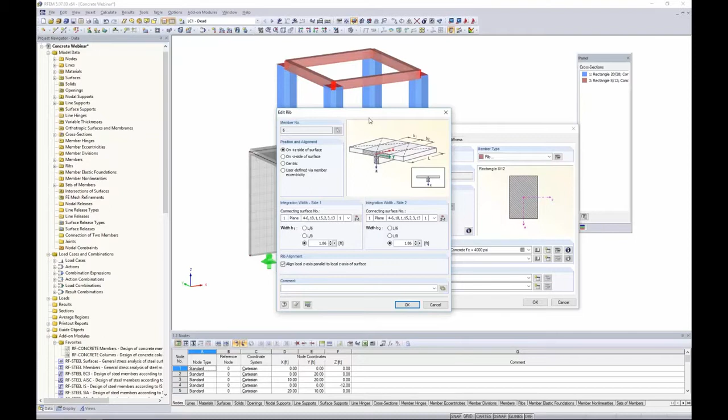What's nice about the rib is that if we go into the Edit Member Types here, we can define where to exactly place the orientation of this rib in comparison to the surface it's related to. So we don't have to manually put in rigid links to drop it down below the surface; the program automatically calculates that for us. We can also automatically set the effective widths, L/6, L/8, or enter a user-defined option. It's nice that the program has this member type as a rib, which is used quite often for concrete members.

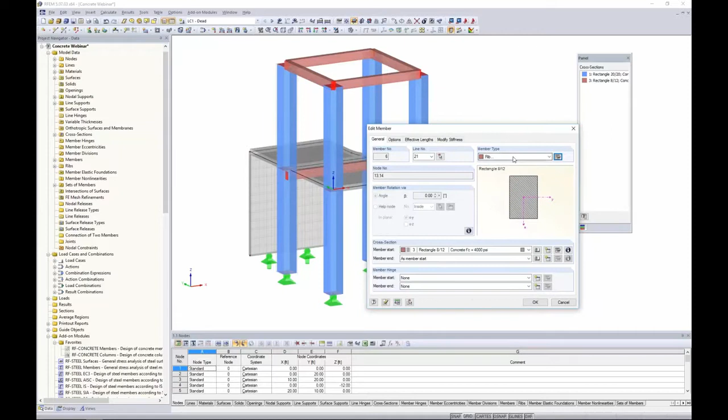You can see here that I've already defined all of this criteria. The last thing to notice about these members, if I take a look at these columns for instance, I right-click and go to Edit Member. Under the Modify Stiffness tab, this is something that needs to be done for concrete members. Typically the default will look like this, definition type none.

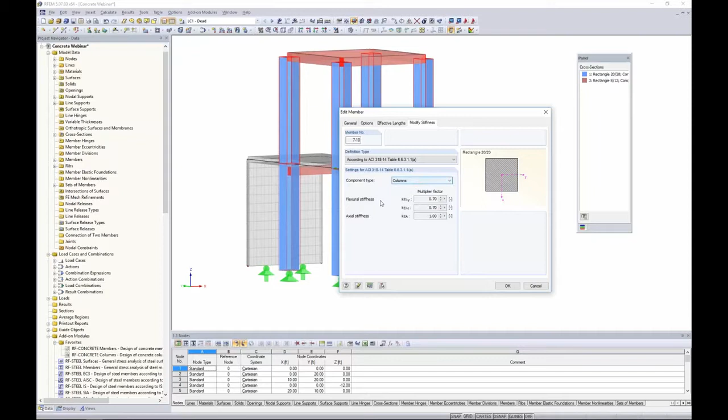What you want to do when designing according to ACI is use the drop-down here for ACI 318-14. If you click on this, it should look familiar. We have our component types: columns, walls, beams, and flat plates. Then you'll see these multiplication factors for our stiffness to take into account cracked cross sections. Anyone who's done concrete design is familiar with this. This is how it's taken into account in the program.

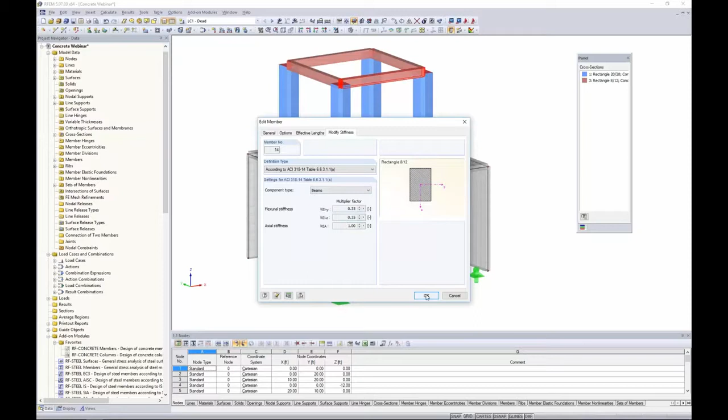For our beams, we have the exact same setting according to ACI, but I've selected beams here. This multiplication factor will be slightly different than what it is for columns, which is why we give you this other drop-down box to define the element. So remember to do so for your concrete design. This is not done in one of the modules, it's actually done in RFEM.

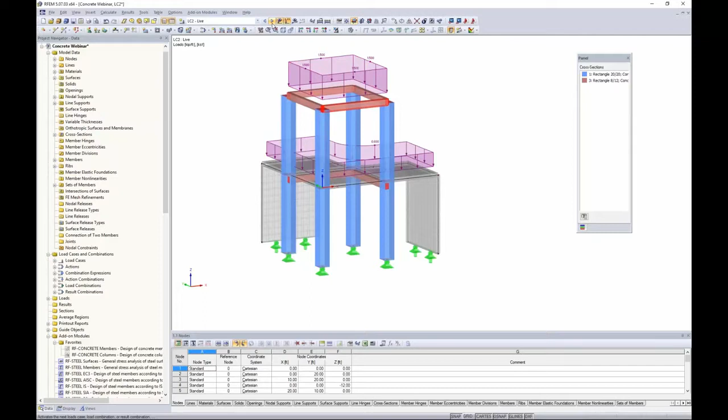The other thing to notice is that I already applied some loads here. We have our typical dead load, surface load here. I put some line loads at the top members, same thing for live load. Lastly, I put in a lateral load, wind load, applied as a line load as well to what we can call our first level diaphragm, as well as our second level to these beams.

We can also take a look at our different load combinations that were generated. If we go into our Load Cases and Combinations dialog box, we'll see our different load cases: dead load, live load, wind load. More importantly, we're interested in these load combinations. The load combinations were generated according to ASCE 7. We have all of our LRFD load equations listed here, only applicable to those load cases that we defined. We also have our ASD load combinations listed here as well.

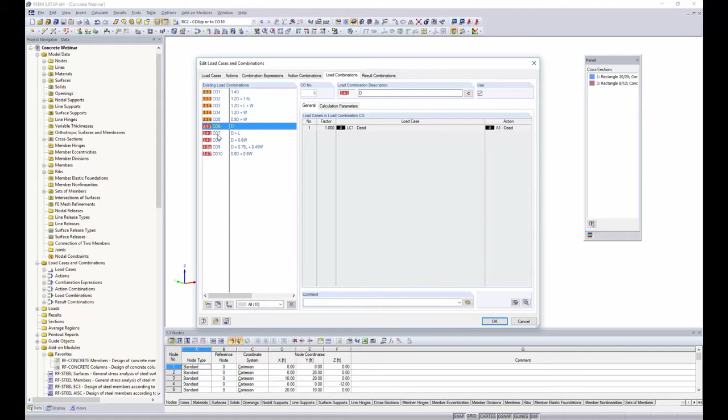Something to note, it is default in RFEM to run these load combinations as second order analysis, or P-delta. You can individually change these if you'd like to something such as linear analysis or large deformation analysis if you have things such as cables. But for now we want to keep it as P-delta effect so that we're doing our member design according to P-delta.

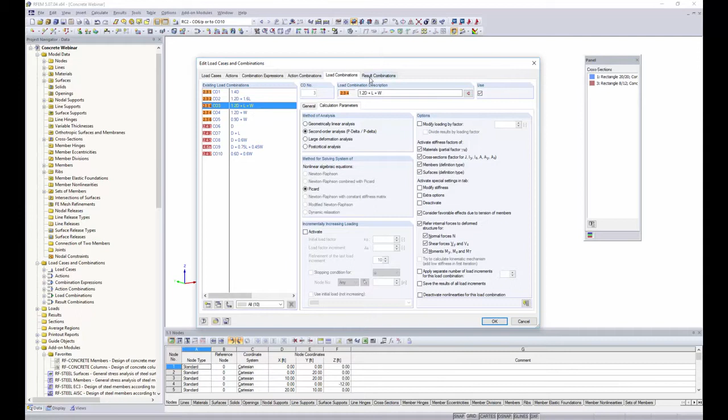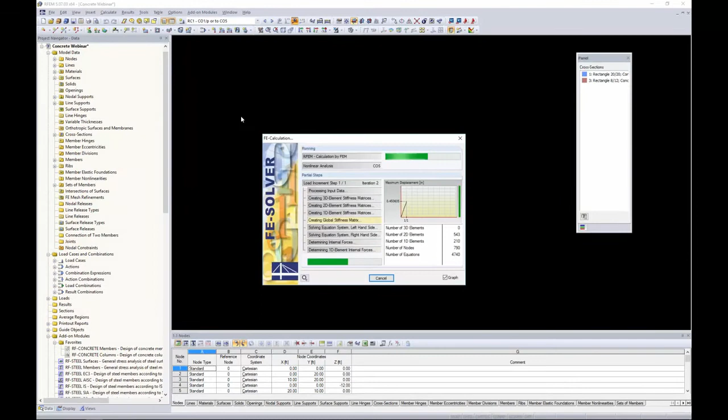We also have the results combination. This is nothing more than an envelope solution. We have the envelope solution for all of our LRFD equations and the envelope solution for our ASD equations. With that said, we can go ahead and run our first analysis with Result Combination 1. You'll notice this is nonlinear analysis, as I was saying, it's P-delta. It solves rather quickly, and we're given the envelope solution for all of our LRFD equations.

Maybe I want to jump to something more like Load Combination 3 here, 1.2 dead plus live plus wind. We can see our deflection is given at 0.779 for our slabs. We have deflections of our members. So what I was telling you is that in RFEM, all of these analysis options are available in RFEM alone.

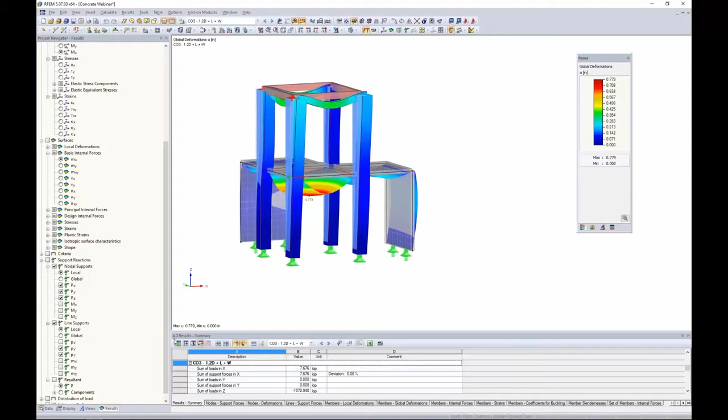Our results tab popped up here. This allows us to view our members, and I can turn this into wireframe mode, our member internal forces, such as our normal forces for our columns. Maybe we want to take a look at our shear forces, moments, for example. We can always increase this diagram to make it a little more visible, and you can print this off. So everything according to our analysis is complete.

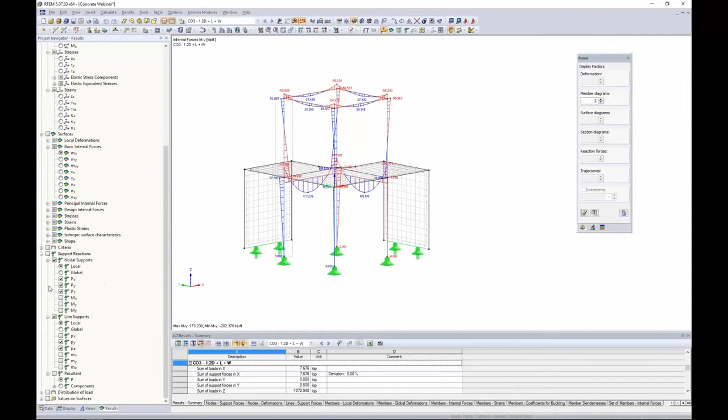Support reactions is something else that I mentioned you can easily show. I just have some simple pin conditions, and some pinned conditions at the bottom of our walls as line supports as well.

So that's basically the extent of RFEM. Now for concrete design, this is where our add-on modules come into play.

The first way to access these add-on modules is through a tab up here called add-on modules. The options are a little bit more clear in this list, with steel grouped together and concrete grouped together, so I could certainly access them through here. Back on our project navigator, in the data tab at the bottom, this is our long list of add-on modules. You can always right-click and add it to your favorites to move it up to the top. I prefer to access it through here only because it's a little bit quicker than going to the drop-down, but it's completely up to you.

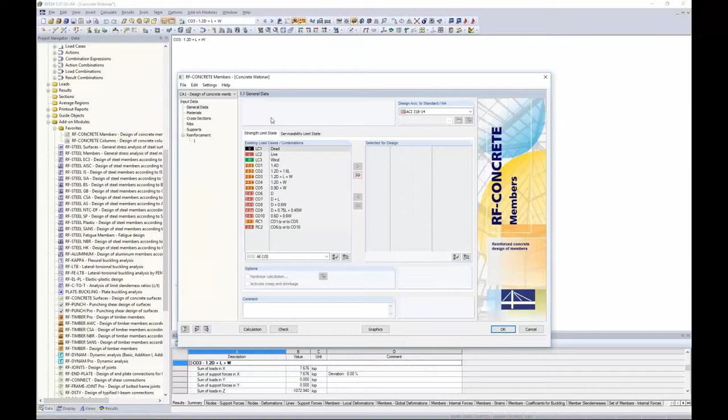So the first thing we want to do is jump into our RF Concrete Members. Something to note here: this is our add-on module. Avid RFEM users are used to this dialog box, but for others who aren't familiar with our program, this is just a simple dialog box within RFEM. All of the materials, the cross sections, the loading, everything is taken from RFEM into this dialog box, so you don't have to worry about redefining any of that information. The add-on module is purely used for code design now.

You can see here that we have design according to ACI 318-2014 selected. Now the first thing the program asks us is what load combinations we want to select for our strength limit state. We will probably use our LRFD equations for this scenario, which is pretty common. Now for serviceability options, we will choose our ASD load combinations. That's typical as well, for crack widths and for deflections we want to choose our ASD load combinations.

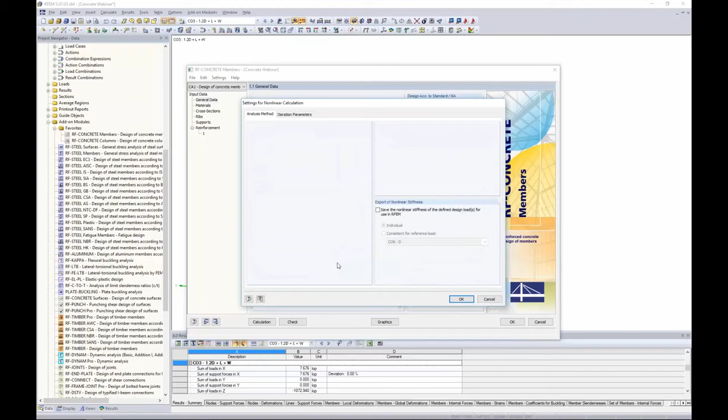Down here, under our serviceability, you'll notice we have nonlinear calculations. This is if you want to take into account creep and shrinkage. I'm not going to get into this today, but it does require an additional add-on module, Concrete Nonlinear. So if you are wanting to take into account cracked sections with creep and shrinkage, that's certainly an option here, but I won't be getting into this today. We will just be sticking with the typical linear elastic analysis.

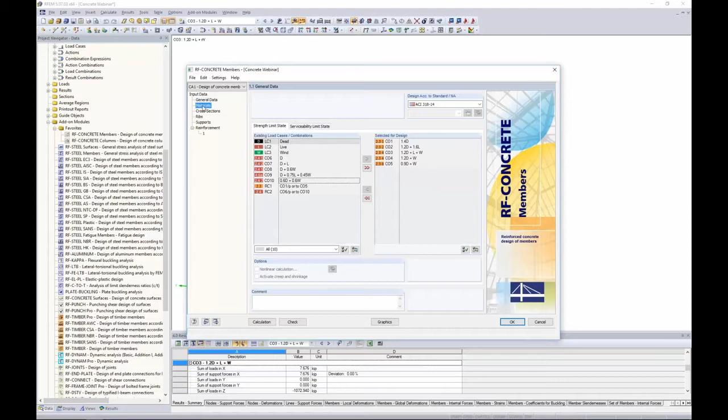Materials, as I mentioned, our 4000 psi f'c will be taken from RFEM. We have reinforcing steel grade 60. You can view the diagrams here for stress-strain for both our concrete and our steel. All of the parameters are given here.

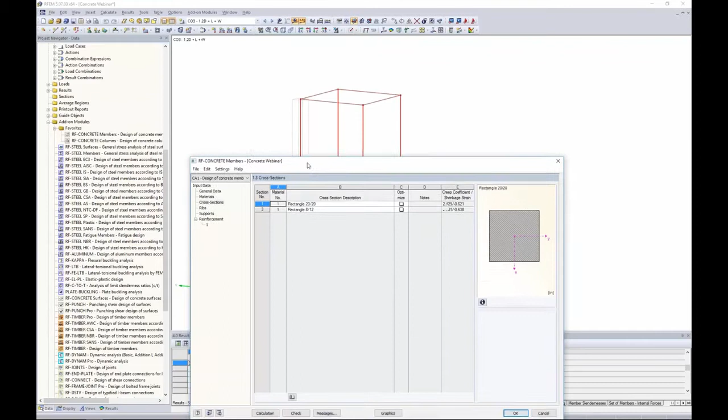Cross sections - we have the cross sections taken from RFEM. Let me exit out of this and turn it back into rendered mode. Going back into the dialog box, I just wanted to show you that under our cross sections, it's nice because as we click on these different table rows, the members applicable to this particular row will highlight in the RFEM model. So everything is synced together.

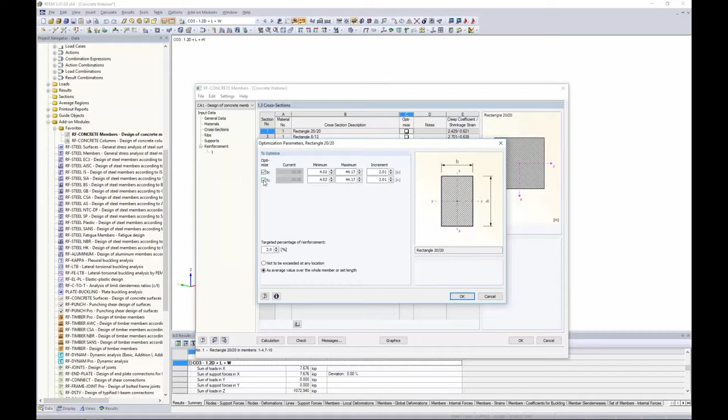We do have the option to optimize. If this is something you want to consider to get the best, most economic design, all you need to do is check this checkbox. You can see we have the option here to optimize. You can set target ranges for your width and height, B and H. You can also set a target percentage of reinforcement. Sorry, I'm just double checking one other thing.

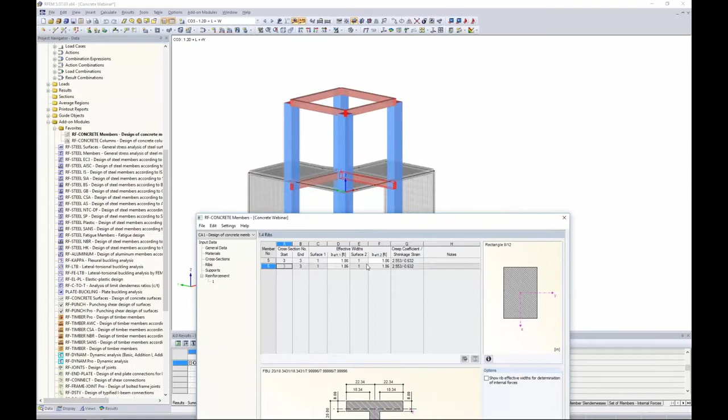Okay, now moving down the list, we have our ribs cross section. This is the ribs category. You'll notice it highlights as I scroll through these different members back in RFEM. This is the ribs that we defined at the beginning in RFEM that I was showing you. The effective width is taken into account how we set it in RFEM. You can always override this directly in the add-on module as well.

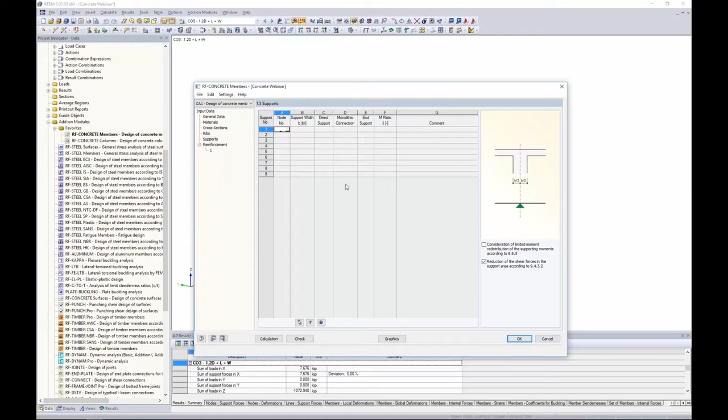Supports is something important because in the code, when we're doing something like shear design, for example, the code says you can take the required shear force a distance d away from the face of the support. Now in RFEM, and this is true for any finite element analysis program, members are just 1D member elements, modeled by their center lines. So we have no idea what the face of the support is. What's great about this add-on module is that instead of maybe over-designing for a shear force that is much too high, we can specify these particular supports.

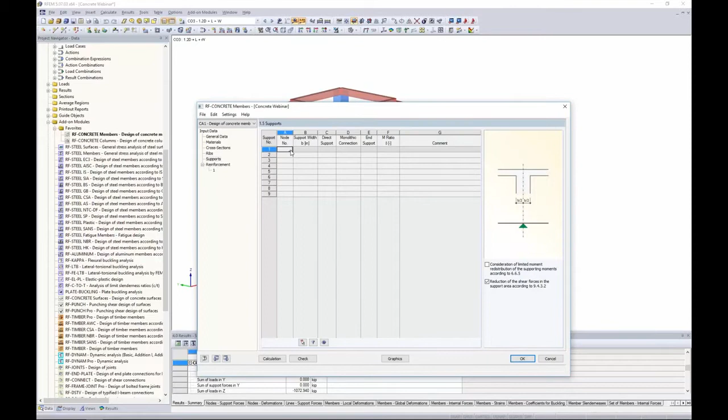All I need to do is maybe start with these nodes up here, and I just highlight them. You'll notice these four nodes are now highlighted in red. I click OK, and they're all available in this list here. Take note of this picture.

As I change things within this table, this picture will automatically update. So support width, our columns are a width of 20 inches. I'm going to set my support width to 20 inches.

For avid RFEM users, you may not be aware of this, but if you press the F8 button, it will quickly fill in these cells according to what was previously entered.

Direct support, this is self-explanatory just by looking at this picture. If I unselect this checkbox, this shows me that the beam is framing directly into that support. If I check it, it looks like it is a continuous beam resting on top of that support. For our case, we'll keep this as a direct support.

Monolithic connection, is it 1 concrete pour or is it 2? Again, shown by this picture.

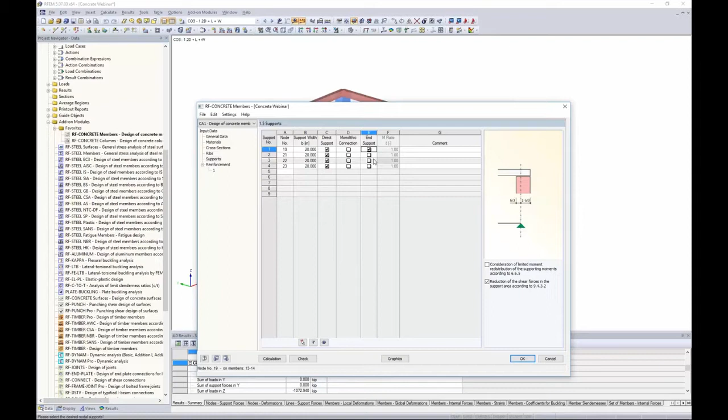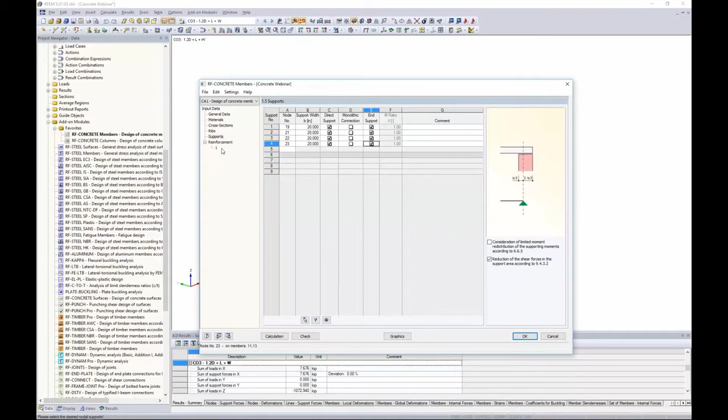End support. Is the beam continuous over the top of the support, or is this an end support condition? For our options up here, for our supports, they are an end support, and you'll notice the red arrow points to which node number I'm looking at. Again, this is great for large models. I don't have to guess, oh okay, I don't remember what node 23 is, go back into RFEM. But everything is synced together. So now we jump into reinforcement.

This is a little bit more lengthy than the other options that we've seen so far because we have a lot of code references and things to take into account according to the ACI for reinforcement design.

The first thing the program asks us is maybe if we want to define more than 1 reinforcement group. This is important if you have a lot of members, of course they're not going to have the same reinforcement layout. So you can create as many groups as you'd like, and give them different description names. For us, we just have 1 description that we'll go ahead and define here.

Applied to which member. So if you have many different reinforcement groups, you can apply them to different members. For the purpose of this demonstration today, I'm just going to select 1 member for design.

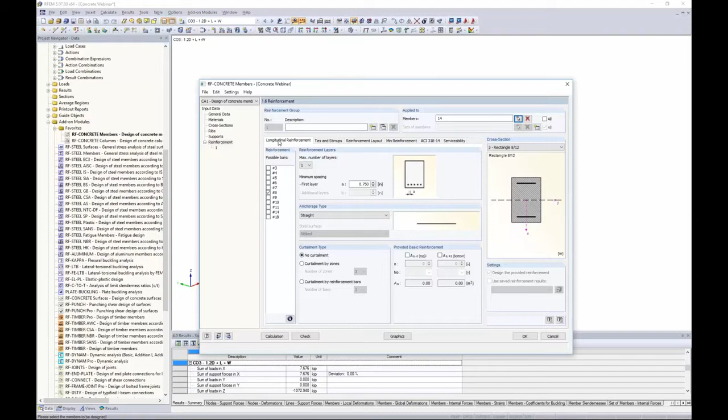Then we jump down here to our first tab, longitudinal reinforcement. What bars are possible for our reinforcement design? Well, let's say I want to choose maybe 5, 6, and 7 here. I'm not really sure exactly what will be needed, but we'll start with something like that.

Max number of layers, this is pretty self-explanatory. If I want more than 1 layer, as you can see here, it's possible. Probably more important for larger beams when you're taking on larger loads. For our case, we will just have 1 layer.

Something else I'd like to point out is the minimum spacing for the first layer. We have a user-defined entry here, so what we can do is refer back to the code, this is chapter 25. The minimum spacing for our longitudinal reinforcement must be the greater of the values of 1 inch, the diameter of the bar, or 4/3 times the diameter of the aggregate.

I have no idea what the diameter of the aggregate is. Probably as an engineer you might know that information, so of course you'd want to take that into consideration, but we do not have an entry for that in the program. 1 inch will probably be controlling here because I do have smaller bar sizes under a 1 inch diameter.

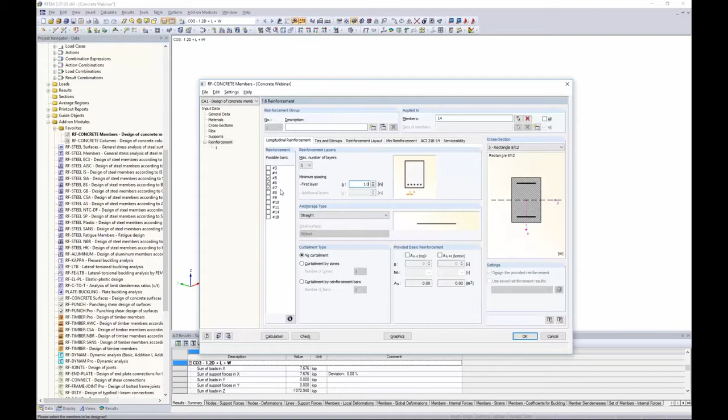Anchorage type. So anchorage and curtailment, I'll talk a little bit in more detail here. The anchorage type, we have every different option that you could probably consider. It's updated with this picture here. You'll notice we can take into account transverse bars, maybe we just want a typical hook. For us, we'll just keep this as straight. Steel surface is grayed out because the code does call that all steel surfaces must be ribbed.

Curtailment type. So curtailment is something that maybe we're not familiar with the term, others of us may be. So with that, I'm going to jump to my PowerPoint here and discuss what curtailment and a little bit more about our anchorage development lengths.

Curtailment is where we can reduce the area of our flexural reinforcement along the length of our beam because we have a lower bending moment there. What this means is that this is going to save us materials and in turn save us money. It is an option in the program to take into account, and I'll show you in just a minute how to do that.

So the other entry that we need to consider here that RFEM is doing in the background is the development length. The program knows whether the bars are in tension, compression, if they're a standard hook in tension, and it will refer to the code chapter 25 for all of these varying equations to make sure that these development lengths are correctly taken into account.

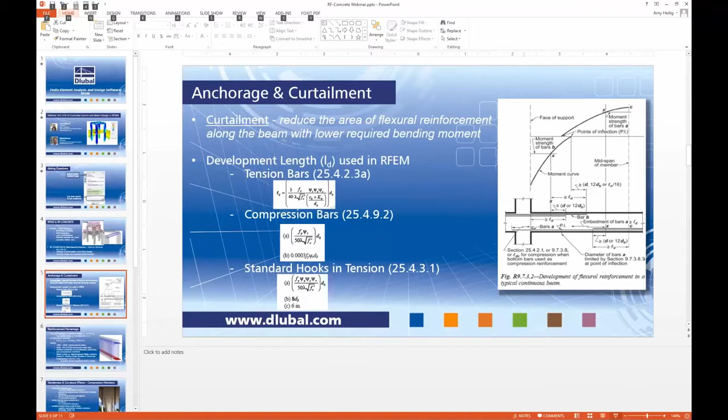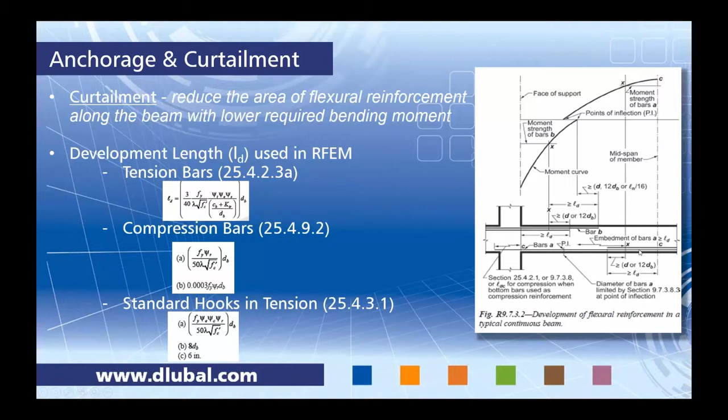Back in the PowerPoint, this is just taken directly from the code. It is figure 9.7.3.2, and this is exactly what we're talking about. Towards the face of a column, we have more of a negative moment here. We have a very low moment in between here, so maybe we don't need as much reinforcement. This would be a situation where curtailment could be used, and then obviously we're getting into higher positive moments towards the middle span of the beam, which will require reinforcement on our bottom. Okay, for our case, we'll just leave it to no curtailment.

Provided basic reinforcement. This is great for structures that are already existing. Maybe you already know the top and bottom area of steel. Here you can actually set that by just defining your number of bars, defining the bar diameter, and the program will automatically consider this as provided basic reinforcement. If this reinforcement does not meet the needs of what the design is calling for according to the ACI, the program will tell you we are considering this provided basic reinforcement, but we also need to add in additional bars in order to meet the requirements of our bending moments.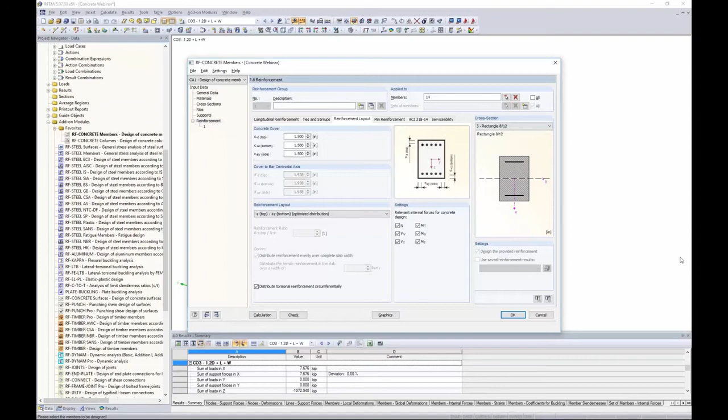Reinforcement layout, concrete cover. This comes from Chapter 20, Table 20.6131. We can consider our concrete cover here. Keep in mind as I scroll through these, this picture is synced up, so it's nice that you know exactly what you're looking at.

This is clear cover, the distance from the edge of the concrete to the edge of the reinforcement. Shear ties are considered in this as well. This is why the cover to the centroidal axis is grayed out, because as I adjust this to maybe 2 inches, the cover to the centroidal axis will be adjusted based on what we put in for possible bar size.

Reinforcement layout: this is how you want the layout for your top versus bottom longitudinal reinforcement. Do we want it optimally distributed? Maybe we want a symmetrical distribution so the top matches the bottom. We also have options to define spacing or layout based on ratios of top steel area over total steel area, or define it as bundled bars in the corners with uniform surrounding, more typical for columns. For us, we'll keep it as optimal distribution for our longitudinal reinforcement.

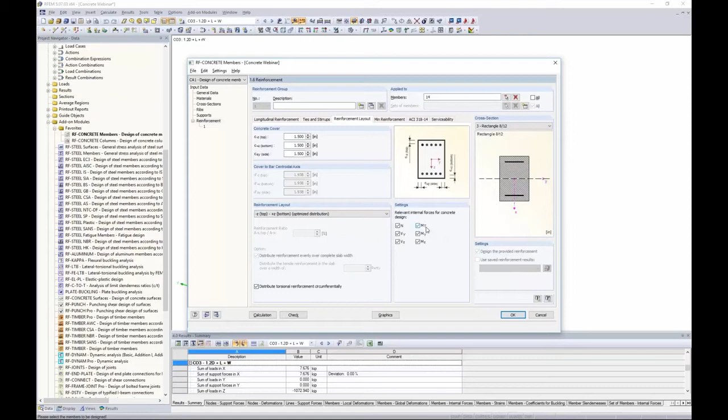Settings: these are the internal forces the program is designing for. We get asked quite often, do we design according to torsion? Yes, we do - you can see here we take into account bending moment according to torsion. We also design for shear and moment as well as our axial forces.

Minimum reinforcement: we have two check boxes here to account for minimum longitudinal reinforcement according to the ACI, as well as minimum shear reinforcement according to the ACI. If you have a user-defined minimum reinforcement, just click this button, define the number of bars and the bar number, and the program will take that into account as well.

Secondary reinforcement is for any reinforcement beyond what is required structurally. So if you are looking to put in a bit more reinforcement than what's required, this is where that's done, under the secondary reinforcement option here.

ACI 318-14, percentages of reinforcement. You can see the default is set at 8% here.

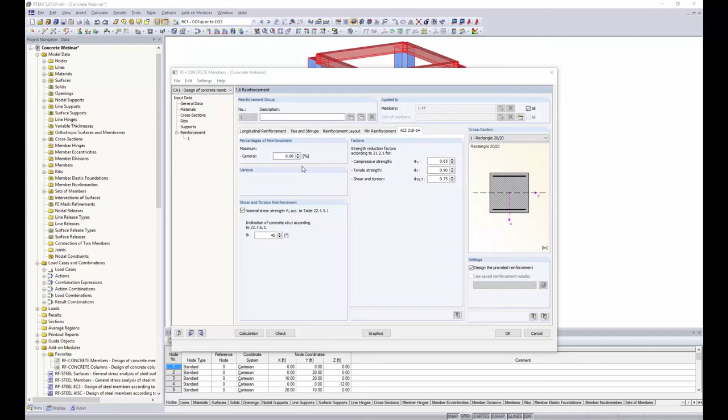This is something I'd like to go into more detail on, so we'll jump back to our PowerPoint. The code tells us that for flexural members, and members where axial load is less than 10% of the concrete strength times the gross area of the concrete, our net tensile strain must be greater than or equal to 0.004. This comes directly from the code, Chapter 9, Section 331.

Now, compression members or columns are actually given a reinforcement percentage. So our steel area must be greater than 1% of the total area, but less than 8% of the total area. This is explained further in Chapter 10, Section 611.

A little history about this: from 1963 to 2002, reinforcement ratios were used regardless of whether it was a compression member or a flexural member - we always used these ratios that you're used to for columns. Then in 2002, the ACI introduced strain limits, which is what you're seeing according to Chapter 9331. The purpose was to achieve uniformity across pre-stress, reinforced, and compression members.

I pulled this information from the journal Case Studies in Structural Engineering, which has an article called Strain Limits versus Reinforcement Ratio Limits. What's interesting is that if you're an engineer used to these pre-2002 reinforcement ratios, and the net tensile strain isn't very intuitive to you, this professor converted the stress equations back into ratios. He found there really was no difference - converted back to ratios as a percentage of gross concrete area, it comes close to the net tensile strain being greater than or equal to 0.004. Worth checking out if you're interested.

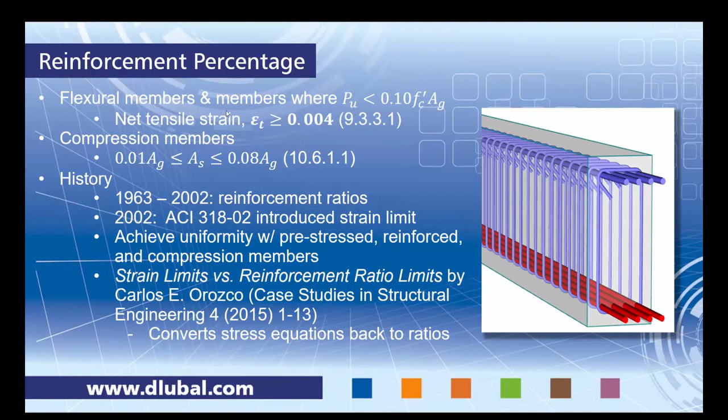With that, we can jump back to RFEM. Back in RFEM, we do have this set at 8%, but keep in mind, according to the code, for flexural members we need to check our tensile strain after analysis, because realistically this is irrelevant if we are not meeting the code requirements for tensile strain.

Shear and torsion reinforcement: we have our nominal shear strength according to Table 22.551 in the code. Inclination of concrete strut relates to our torsion - the default is 45 degrees. You can certainly put in another angle, and for more information it's best to refer to the code, Chapter 22.

Factors - pretty self-explanatory here. If you've done concrete design, we're all familiar with strength reduction factors. It's in Chapter 21 of the code. These right now are set to what the code calls for.

However, you certainly can change those if you choose to do so. But keep in mind, if you are doing design according to the ACI, then you will be following the code for these entries.

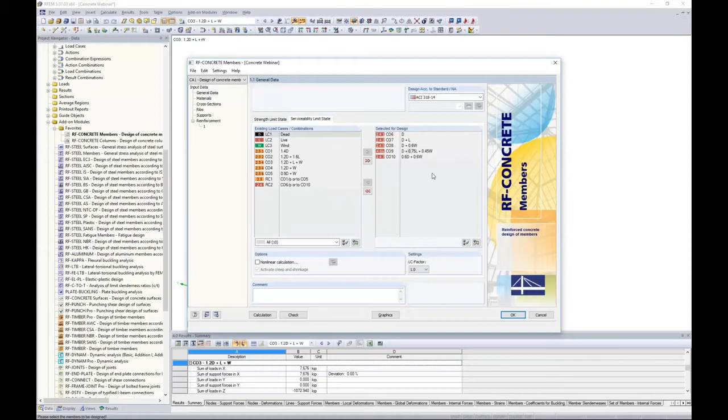This serviceability tab is only available because, back in the General Data tab, we defined our ASD load combinations for serviceability. If I defined no load combinations here, I would not have this serviceability option. So if that's missing, it's probably because you didn't define any serviceability load combinations.

Crack analysis. We have the options here to limit the value for allowable crack width based on a couple of criteria. The first option is limit values, and in this drop-down box, the ACI did studies on various exposure conditions and came up with a limiting crack width that approximates what the max crack width should be. For example, if you're in a water retaining structure, your crack width is much smaller than if you're in dry air. For us, maybe we'll stick to something like humidity, as if the structure is down south where it's quite humid. Same for the bottom, so our crack allowable width is 0.012.

Now you also have the option under user defined to just type in whatever you'd like. But we do need to give it some type of limit so that the program knows to flag it if we are over those limits.

So how exactly do we determine what the crack width is? What's interesting is the ACI does not give you an exact equation for calculating crack width. In chapter 24, it tells you to limit the longitudinal spacing so that you can decrease your crack width, and that comes from this section in the ACI. So when you have this checked, the program will limit your spacing based on this criteria.

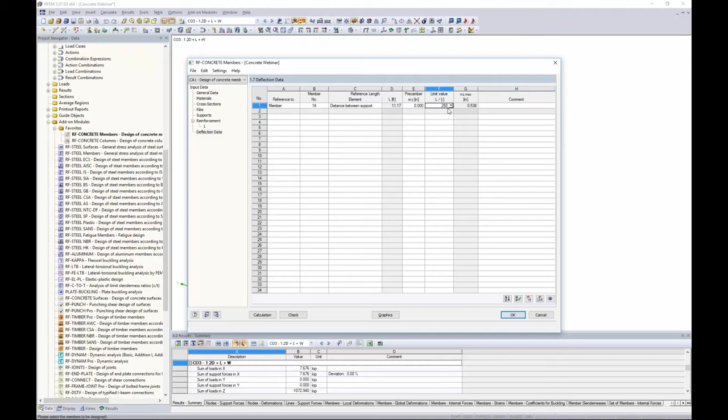Back here under serviceability, we also have the option to activate long-term deflection according to 24241. This is just a table in the code that will take into account in the calculations for deflection the duration of the load, and we can set the number of months here.

So with that said, I think we are finally ready to run an analysis. Now, all I need to do is click calculation in this add-on module, and what it's giving me now is reinforcement design according to ACI. So you'll see here that now all of this reinforcement, or this results section, is available here. The first thing to look at is our required reinforcement.

In this table right here, we will see a summary according to cross sections, or maybe we want to view it by member. Because we only defined one member here, we're still just looking at member number 14, so it doesn't matter. We're getting basically a summary of our reinforcement - our reinforcement at the top given, our longitudinal reinforcement at the bottom, and then we have the reinforcement for required longitudinal torsion. You'll notice this is set to 0, so this is only applicable if we have some torsion within this beam.

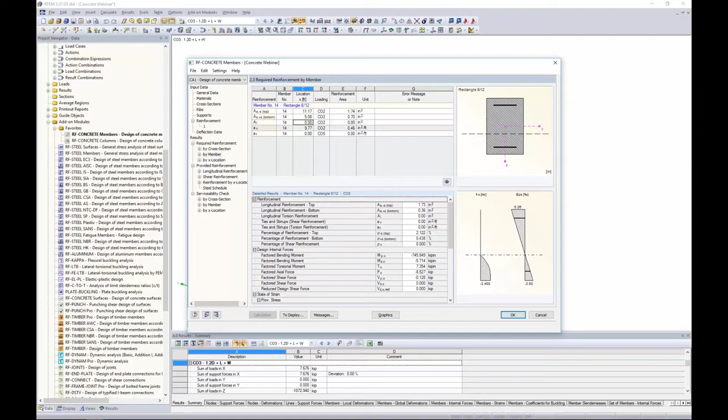Then we have our shear reinforcement, and lastly our stirrup reinforcement for torsional moment. This is 0 because we don't have much torsion in this particular beam.

As I click through these different options, my stress strain diagram updates here according to my cross section.

This is also something I really want to emphasize. There are a lot of other programs out there where you simply don't know where your numbers are coming from. I really think RFEM is such a strong and powerful program because we always try to give you as much information as possible. This allows for very few tech support calls and emails saying 'I don't understand where these numbers are coming from,' because we list all variables here and give code references where we can, so you can really understand where those numbers come from.

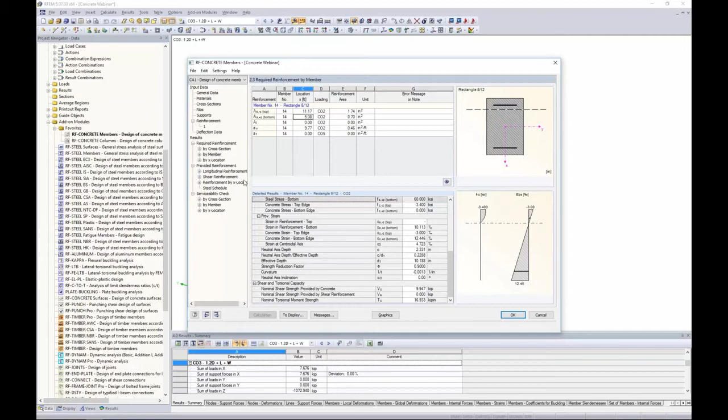We can also view the required reinforcement by X location. What's nice is that as I scroll down through these different options, you'll notice this red arrow updating depending on where I'm at along the length of the beam.

So for large models, this is beneficial so you can really understand what exactly you're looking at. And again, we have the long list here that updates as we scroll through these different options to show all of our variables and how we came up exactly with these numbers.

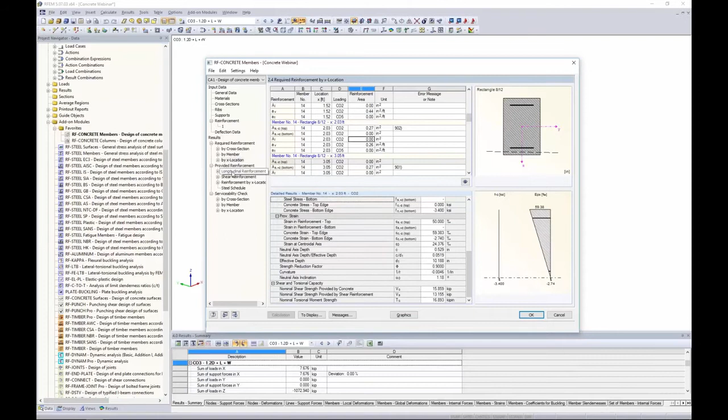So now that we know our required reinforcement, the program needs to come out and give us some sort of design, and that's where this provided reinforcement comes into play.

The first tab here is our longitudinal reinforcement. So in order to meet the required reinforcement, the program has set 3 number 7s up at the top here and 3 number 5s at the bottom to meet those requirements.

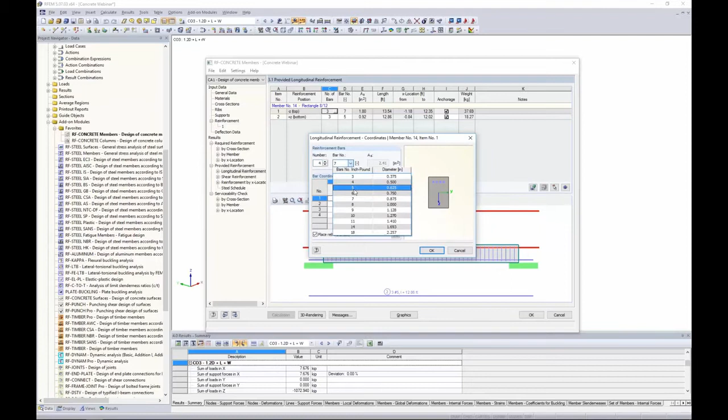What's nice here too is that if you take a look at this and think, I'd really prefer not to use number 7 now, I can easily click in this table. I can increase to 4 number bars, and I would like to use number 6s. I click OK, click on any one of these other tabs, and the program says, wait a second, you changed your values for your number of bars and bar size. I need to recalculate. So you quickly recalculate, and the program updates only what's applicable to the changes you just made. A very quick and efficient way, rather than jumping back into this reinforcement to force the bars the way that you would like them.

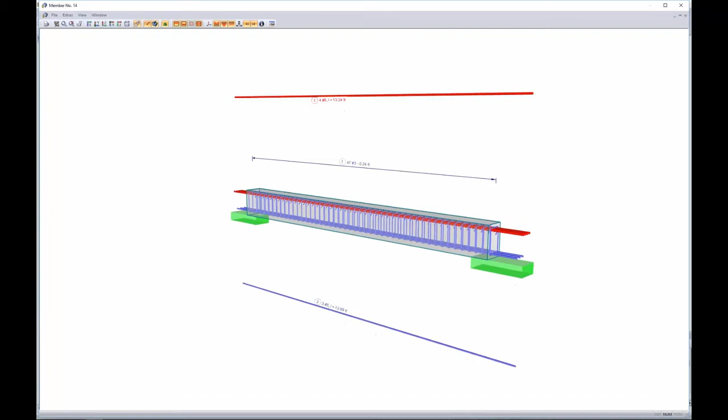What's also interesting here is we get this nice picture, but if I double click in it, I get basically the 3D layout of my reinforcement. You can see here that I have my longitudinal reinforcement shown, and I have my shear reinforcement. It even shows the development of my shear reinforcement as well. I'm given the callouts for the bar sizes as well as the number and spacings. I have control here to turn on and off any of these reinforcement bars, and this is great for printing purposes.

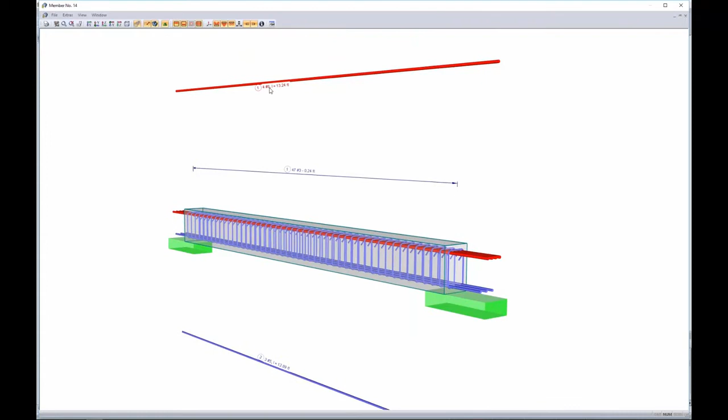And just like in the tables, if I think, never mind, I want to go back to 3 number 7s, I can just double click in here and I'm given those exact same options you just saw in the table. Again, this is a great and efficient way to quickly make changes. Maybe the anchorage type needs to be a hook instead of straight. I click OK and everything is automatically updated.

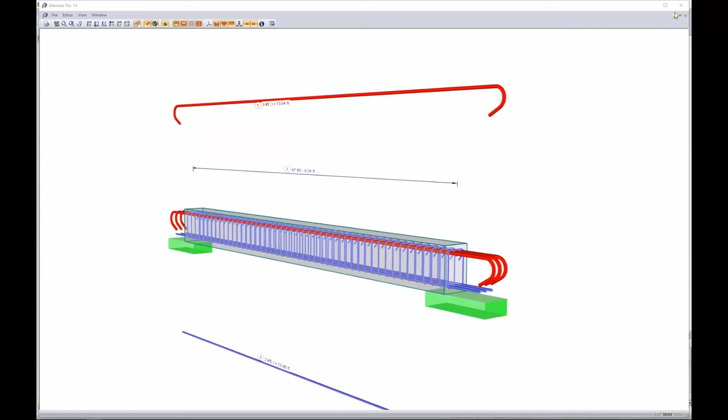So I click out of this picture, maybe click on another tab, the program says, hey, you made changes, let's recalculate. It recalculates only those bars that had changes so that everything is updated in our results. Shear reinforcement, same exact concept.

We give you a nice cross-section here, including the lengths for the shear reinforcement and the development. Same thing, picture, we can double-click on it, and it looks exactly like what we were just viewing. In both pictures, you can modify any of the reinforcement and add this to your printout report with just the click of a button.

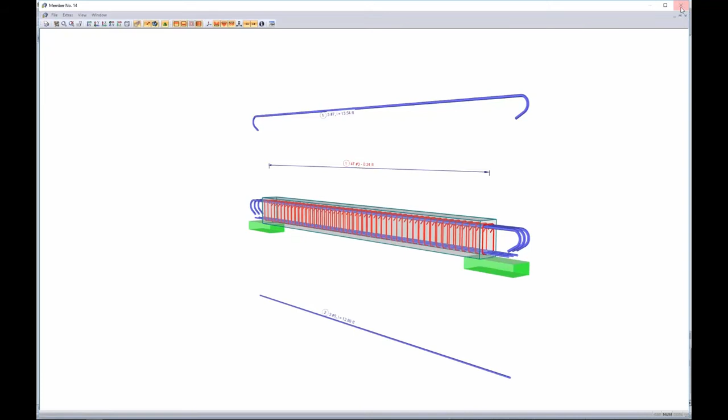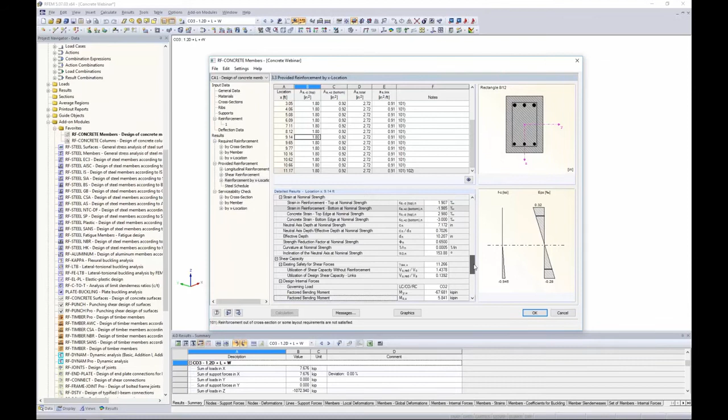Reinforcement by X location is basically just a summary along the length of the beam. Again, this nice red arrow shows us where we're at. We get a summary of our top and bottom longitudinal reinforcement as well as our shear reinforcement. And as I always like to mention, here is our list of any variables and equations that went into calculating this reinforcement.

Lastly, we have a steel schedule. This is your material takeoffs, which a lot of us, of course, are interested in for the total steel.

Serviceability check. This just relates back to the crack widths and the deflections. You can see that according to the deflections, we have a ratio of 0.41, so we are under those limitations that we did give it under the deflection data back here.

Now we have our spacing limitations, which I mentioned the code calls out for cracking. And we also have the ratio according to the Gergely-Lutz equation, which you can see here is calculated in comparison to the limiting crack widths that we also gave it in this criteria.

So we can view it by cross-section or by member. Again, same scenario since we're only doing one design here, and of course by X location.

Something else to notice in any of these tabs, you'll notice this notes section. If you see any numbers here and click on this messages, it should correlate to any warnings or just information that the program would like to give you about your reinforcement design. For example, this says 334, the effect of the bending moment MZ is not considered in the given deflections.

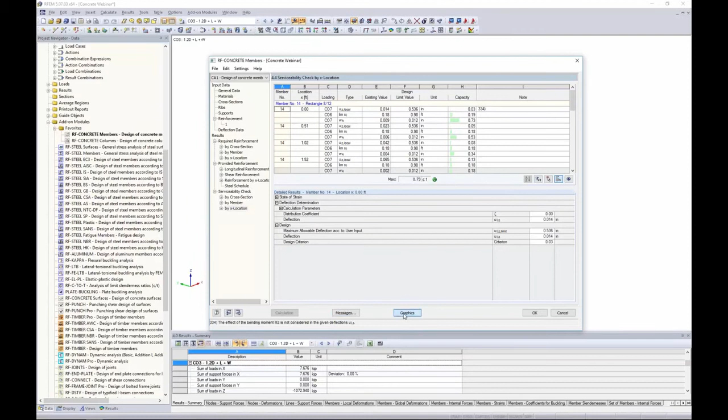So this is important if you are seeing those numbers to just quickly take a look at the messages. And the other thing that we can do is we can view everything graphically here. Once I click graphics, you'll notice in my drop-down box here, I have another option called RF concrete members.

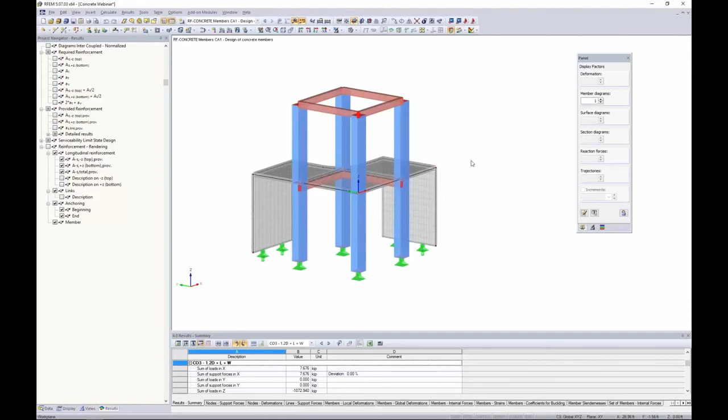Now in my results tab, I no longer have all of the internal forces from RFEM. I can easily jump back to those, but now I'm looking at the results from my concrete module. I can turn this back into wireframe. Maybe we want to take a look at our top and bottom reinforcement. This is nice, maybe we want to add this to some pictures, and you have all of these options to view this graphically as well.

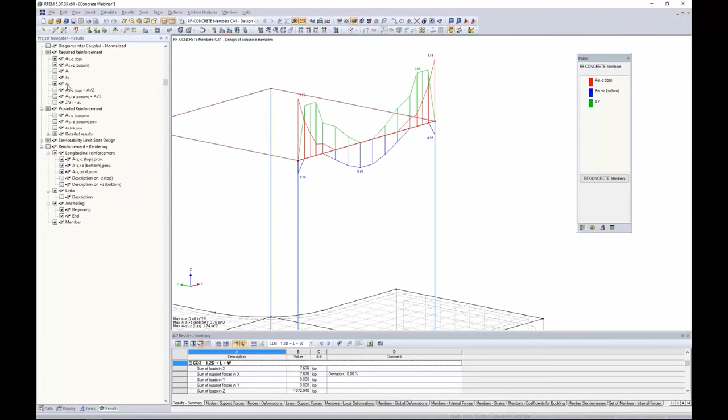Sometimes this makes a little bit more sense than viewing things over and over again in a table just to reiterate what exactly is going on. You can see here shear reinforcement, and actually you can even show that nice rendering picture that we were viewing in directly in the model. Again, maybe good for printing purposes just to show you how things are related here to the rest of the model.

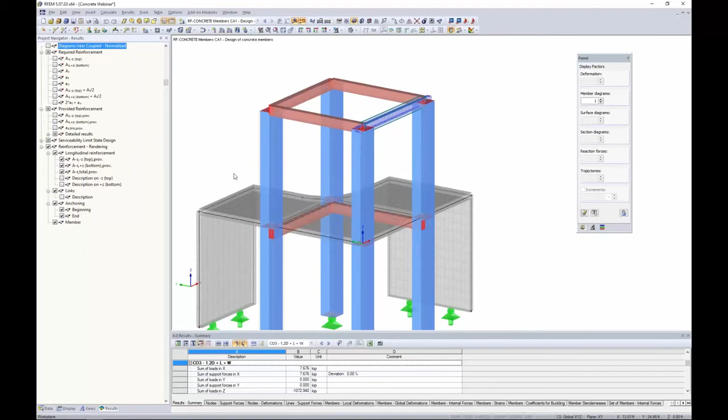So with that said, that basically sums up our beam design. Now we want to jump into our column design. And before I do that, I want to go back to the PowerPoint because this is something that is very important in regards to column design.

We often get asked, okay, do you design columns according to the moment magnification procedure or second order analysis? And this is where I really want to clear up what's going on in our add-on modules. The code in ACI 2014 says that we have 4 different options to account for slenderness and curvature effects for our compression or our column members.

The first is a first order analysis according to section 6.6. This is purely a linear first order analysis. Now, second order effects are taken into account with our moment magnification procedure. So those of you who've done column design probably are very familiar with the moment magnification procedure. Basically, this will just increase our moments to account for those second order effects.

What's great about the moment magnification procedure is that you as the engineer can easily cross-check these numbers in comparison to the software. When we're getting to a little bit more complicated analysis, it's not that easy to cross-check by hand calcs, but with this option, we certainly can do so.

And first order analysis with moment magnification is taken into account in RF concrete columns. So this is the module that I will show you guys next. Again, to reiterate, first order analysis, RF concrete columns.

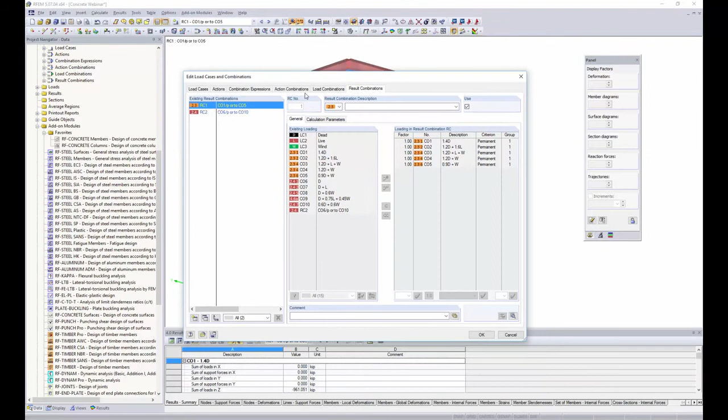Back in RFEM, this is in RFEM, not the add-on module, we want to go to our load combinations dialog box. As I previously showed you, all of these load combinations are according to second order analysis. What we actually want to do here is select all of our load combinations and choose geometrically linear analysis. This is important so that we don't account for second order effects in RFEM.

Then we go into our RF Concrete Columns and again account for second order with moment magnification. Now the program is smart enough to throw up a little warning saying, hey, you are accounting for second order effects twice. Realistically it's not that much of a difference if you choose to do so, but it will still warn you that you are accounting for them twice.

So for the sake of this, to correctly take into account moment magnification, we want to change all of these load combinations to a linear analysis. Now, if you are jumping back and forth between beam and column design, maybe you want to make a copy of these load combinations, set half of them to linear analysis and set the second half to second order analysis. Then you can individually assign those load combinations in these separate add-on modules.

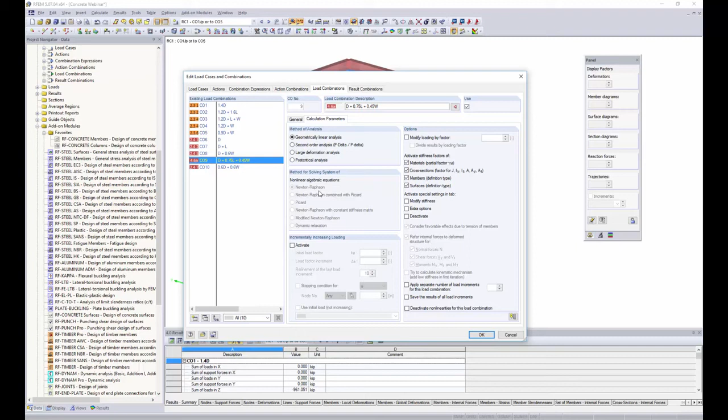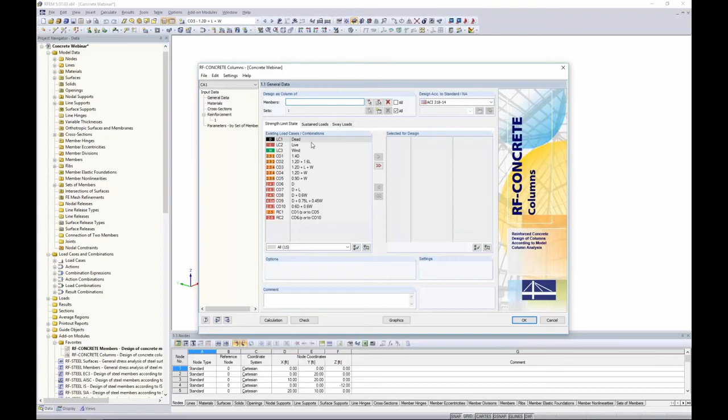So now that that is done, we can go into our concrete columns and take a look at our design loads here. So now all of these design loads are ready to go with a linear analysis taken into consideration. This module looks very similar to what we were just in, but you'll notice we're in the Concrete Columns add-on module here. We need to define the members or the sets of members.

If I go back to the add-on module and turn this into wireframe, you'll notice these two columns here, and it has this dotted line around it. This dotted line means that it's a set of members, and the reason why I did that is because we probably want to design these two columns to have the same reinforcement, maybe the same size, maybe they'll be cast as one continuous member, whatever it is.

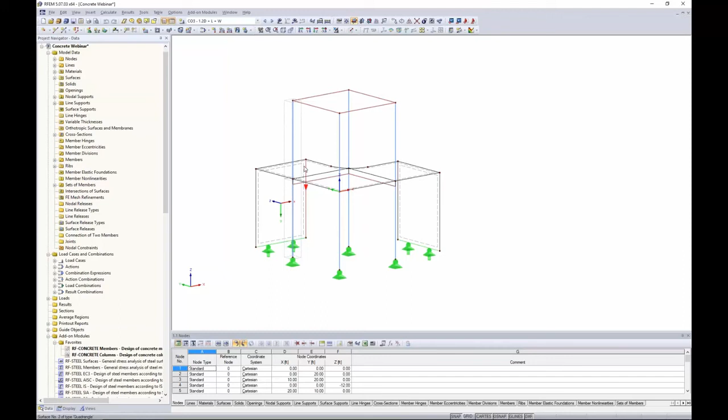We probably want the same design for all of them. So all I need to do is right-click, select both of them, right-click, and then here I can create a set of members. This is a continuous member now.

So when we're back in this add-on module, instead of designing each individual member, I have the option down here to design according to my member set. So I'm going to design according to this single member set here for the purpose of this example. Strength limit state, I am going to choose my LRFD equations here. And then we get into our sustained and sway loads.

And this gets a little bit confusing because this is obviously very different than just our typical strength and our ASD load combinations for serviceability. So going back to the PowerPoint, I do expand on this a little bit further.

Here, as mentioned, we are doing a first order analysis. I know I repeat that a lot, but that is the whole purpose of this add-on module. As you notice, we have the strength limit state, sustain loads, and sway loads. Strength limit state load combinations used for design are typically LRFD.

Sustained loads come from section 6.6.3.1.1 and another section. This tells us we need to take into account additional deflections due to creep. This doesn't necessarily have to be a gravity load, it could be a lateral load as well. Typically you'll find things like dead load are something you want to consider for creep, and that's where we'd add this into the sustained load, something like our load case dead load.

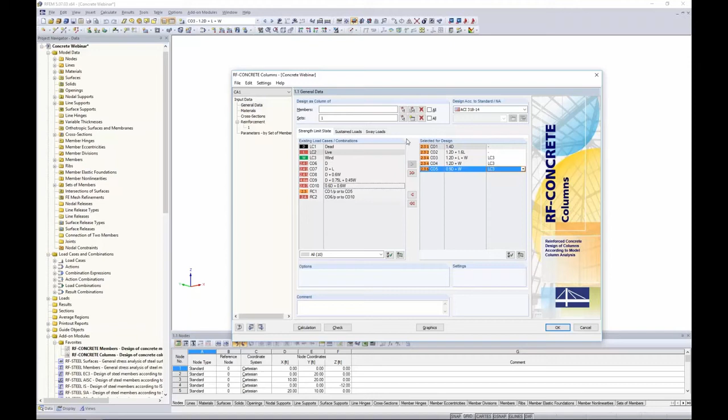This is very important to remember: back on the strength limit state, we now have this drop down available, and we need to choose which loads in this load combination are used for sway purposes. So here you can see I'm selecting load case 3 for wind, which is what I put under my sway loads, and it's now available in this drop down. That's a little bit about why we have these different tabs. They really do affect the moment magnification procedure.

Materials - again, a lot of this is just repeat information from the previous add-on module, so I'm not going to spend a significant amount of time. Materials is taken from RFEM. We have our cross sections. You'll notice we don't have the option here to optimize, so just something to keep in mind within these concrete columns.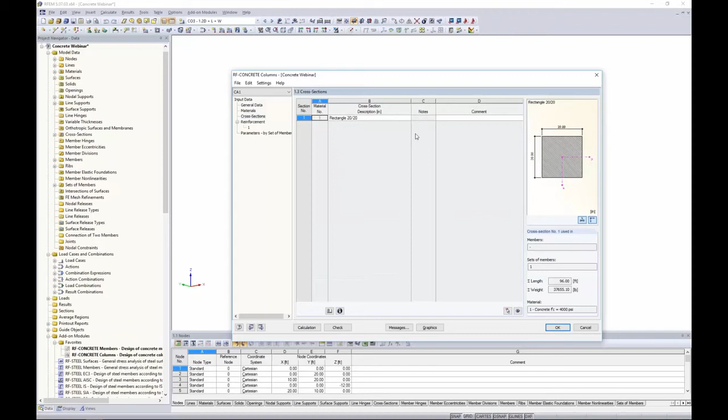For reinforcement, we choose the reinforcement type we would like to consider. The layout is typically uniformly surrounding for columns. Anchorage type, we have straight, hook, bend. We also have the option to consider steel surface such as zinc coated or epoxy coated. This will be added in our other add-on module fairly soon as well, because it does affect your development length.

Ties and stirrups, same concept as before. We'll select number 3 as a number 4 to be considered. Secondary reinforcement, again, this is just any reinforcement beyond what is structurally needed. For us, we won't consider this.

Reinforcement layout - you have the option here to define your cover according to the centroidal axis or the edge of the rebar. I always like to choose the edge of the rebar, it just makes a little bit more sense to me. The centroidal axis will be updated considering your shear reinforcement as well as half the diameter of the longitudinal reinforcement.

The program also asks us the bar number to be considered for preliminary design. Well, maybe I want to choose the most economical, number 4, for example.

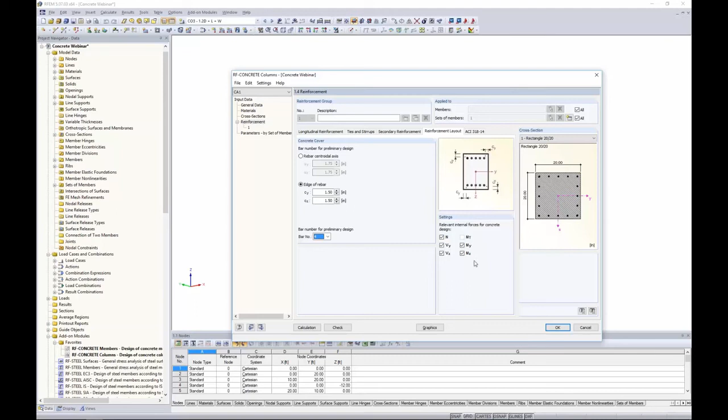Relevant internal forces for concrete design - you'll notice here we do not design for torsion within this add-on module. So if torsion is something you want to consider for your columns, you would need to do so in the concrete members with P-delta effects and that sort of application. In the code under the column sections in ACI, it really just says if you have torsion that exceeds a certain amount, refer back to the beams. So that's why we really don't have an option here to design for torsion, but it is possible in RFEM itself.

And lastly, ACI 318-14 - this is all the exact same stuff that we just saw previously, giving our longitudinal reinforcement minimums and maximums, our strength reduction factors according to the code, as well as our shear reinforcement. Notice that torsional reinforcement is not considered here.

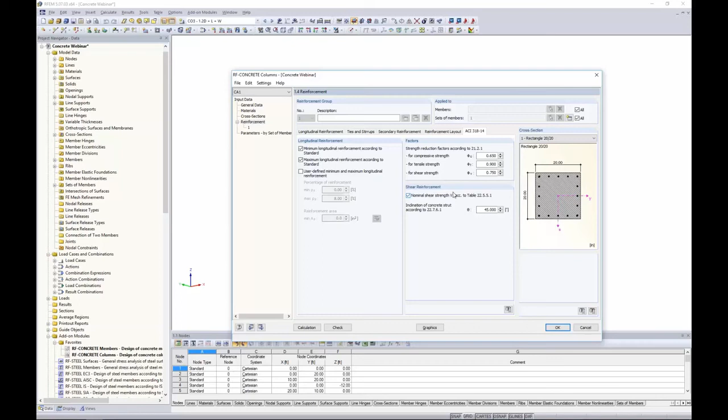Parameters is something that is lastly important for the moment magnification procedure as well. Here, if we want to consider buckling about our Y or Z axis, which is given here - and by the way, if you are not sure about your Y or Z axis, you can always right-click on your members and turn the local axis system on.

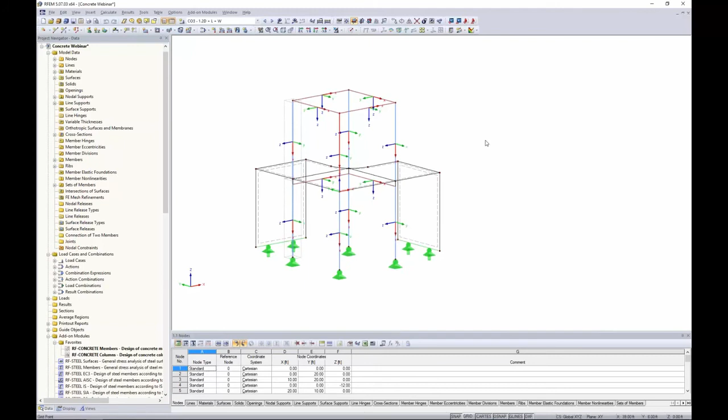So now we can see what direction is Z and Y. We can even turn this into a rendered view so that we can view, if we didn't have a square column, what exactly is going on with our local axes.

So with our parameters here, we want to define if buckling is possible. Is it unbraced or is it braced? The program will automatically calculate these K factors according to the code. We have those different charts in the ACI that calculate these K factors, and the program takes all of those into account.

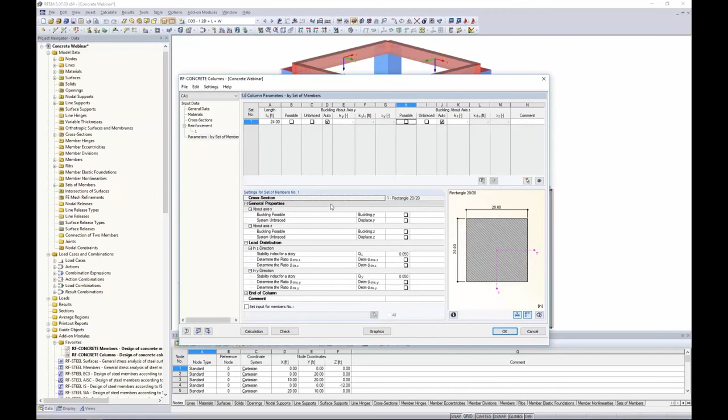Same thing with buckling about the Z-axis. For this option, I'll just leave this unchecked for now just for simplicity. Again, all of our information is given here in the tables down below.

So now we're simply ready to run a calculation. Should be basically what you're used to seeing in the other add-on module, but now we have a set of members that we're designing for.

The first thing that pops up with our results is our check, our set of members. So you'll see here that we have our design ratio, and we have the code reference immediately available here. This is really nice, so you know exactly what's controlling overall for this particular column design.

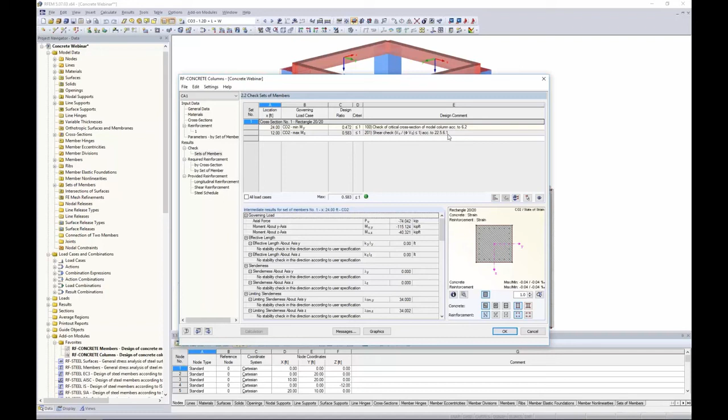Right now we have a check of critical cross-section of the model according to 6.2. Our shear check is according to 22.5.6.1. We have our nice green smiley face because we are below 1.

And as I always love to point out again, everything is available here in our table, all variables that came into play with any of these checks and code references where they're applicable. So again, not a black box type program, but anything you'd like to know how this came into account for the calculations, we try as best we can to put it into the program.

You also have these little pictures down here. We can view the stress diagram of the concrete. We can give it value. So if this is something you're interested in, this is available here.

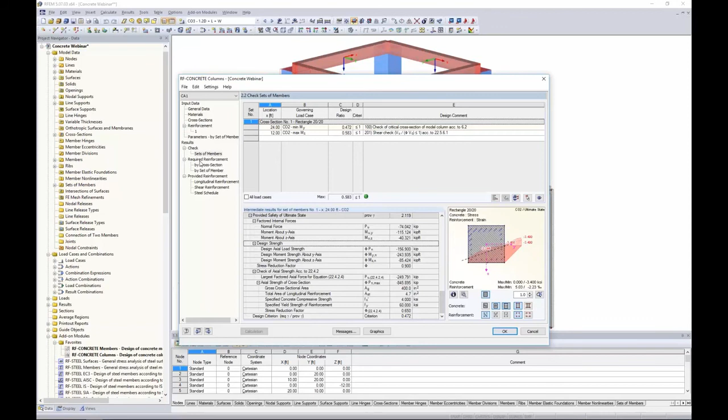Required reinforcement, this should look a little bit similar to our other add-on module. Obviously here we're only giving longitudinal and shear. We don't do torsion. We're just given the basic layout for those.

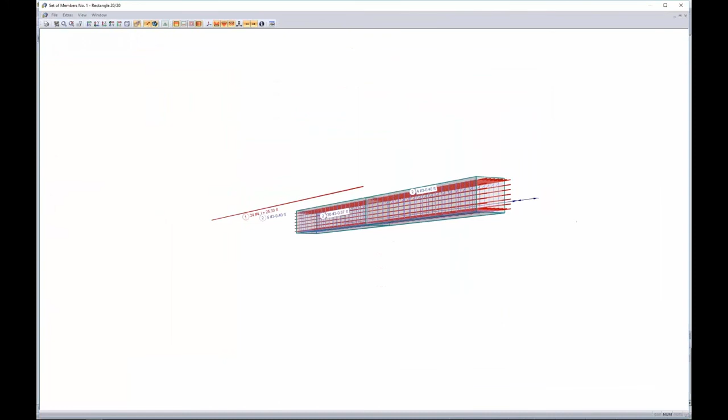And lastly, the provided reinforcement. This looks just like our picture for beams. We can double click and we're given a nice 3D rendering. Just like with the beams as well, we can double click on any of this reinforcement to quickly change it if we'd like to force it to be another size, another spacing, whatever else you please. And we can view everything graphically.

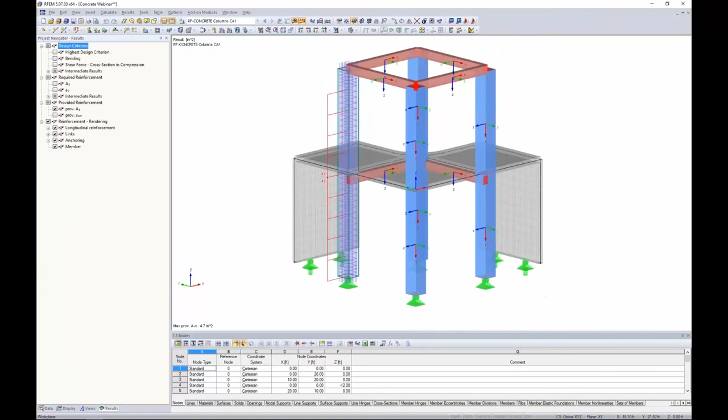As I mentioned with the other add-on module, same procedure here. So you can see there's really not a whole lot of differences between the members and columns add-on module. It's nice, once you get the hang of maybe beam design, you can also easily do your column design as well. But it all just depends on how you want to do your column design. Is it according to moment magnification? Well, then you would want to use the concrete columns. If you'd like to do it according to P delta, then you would choose concrete members.

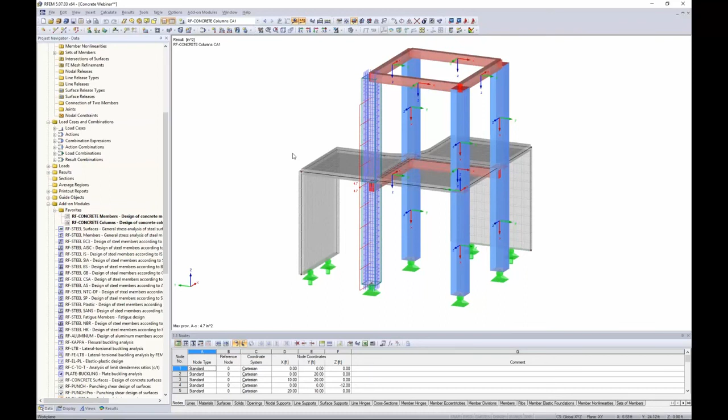So with that, that basically sums up the reinforcement design according to ACI for our beams and our columns.